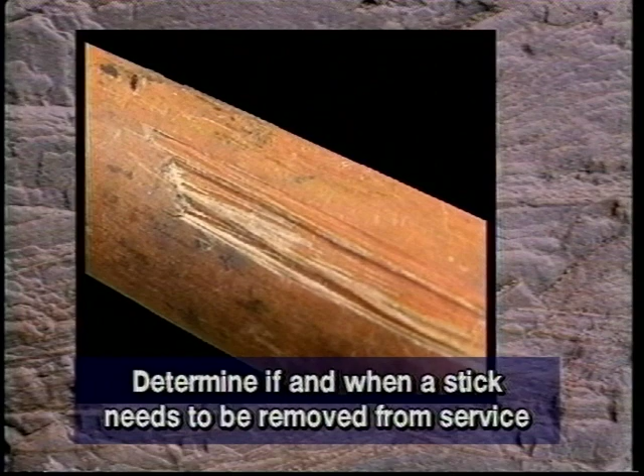Basic hot stick care, including wet-dry testing. The purpose of this course is to familiarize the viewer with information necessary to properly wet-dry test a hot stick, perform daily care and maintenance, determine if and when a stick needs to be removed from service, refinish or regloss a hot stick from a major manufacturer.

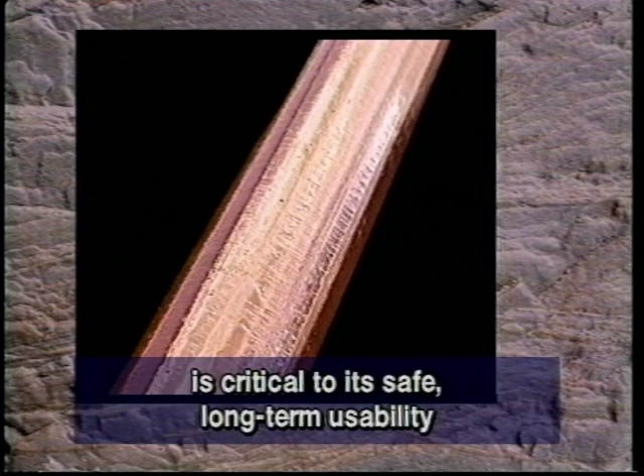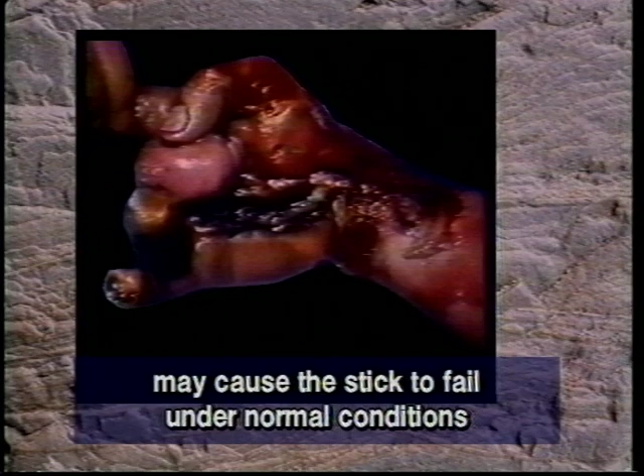The importance of a clean gloss finish on a utility hot stick is critical to its safe, long-term usability. Accumulated dirt, contamination, or the lack of a clean glossy surface may cause the stick to fail under normal conditions, resulting in death or injury to the user. Wet-dry tests have been developed to ensure safe operation of a hot stick. These tests should be performed every 6 months or when the condition of the stick is in question.

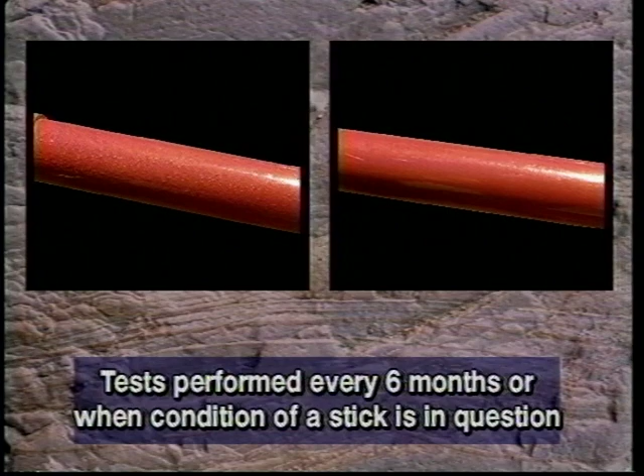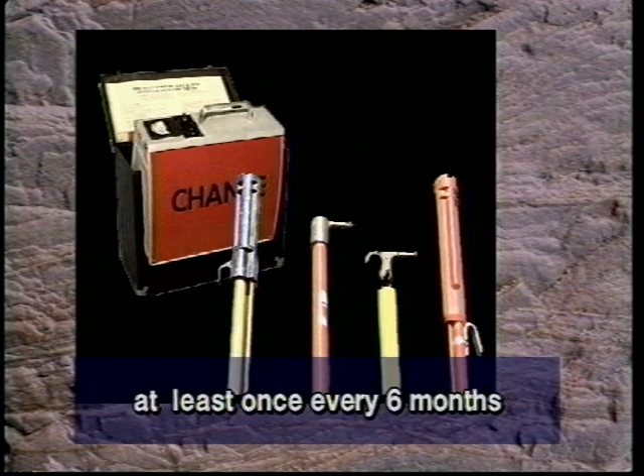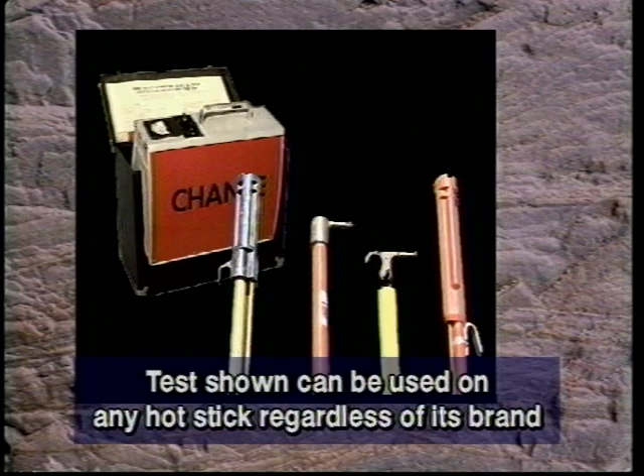Wet-dry testing. The wet-dry testing of a hot stick to 100,000 volts should be performed at least once every 6 months and before returning a stick to service after refinishing or repair, or when the condition of any hot stick is in doubt. The test shown can be used on any hot stick regardless of its brand.

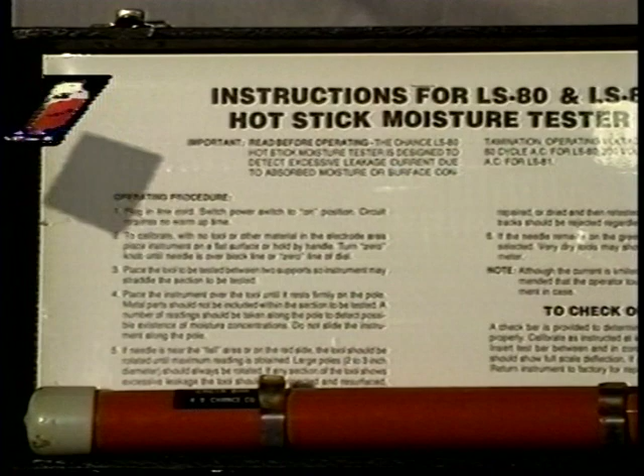Testers have been developed which operate on 120 volts AC. This tester, the AB Chance LS80, converts the AC voltage to 1800 volts DC and interpolates the information received, providing an effective test rating of 100,000 volts per foot, wet or dry. The procedures of the tester may vary, so follow the directions included with the tester owned by your company.

Calibration of the tester. Once connected to local current, the adjustment knob should be checked to ensure it is turned fully counterclockwise. Then, the tester is turned on and calibrated by adjusting the dial clockwise until the needle on the meter is in line with the calibration mark on the meter faceplate.

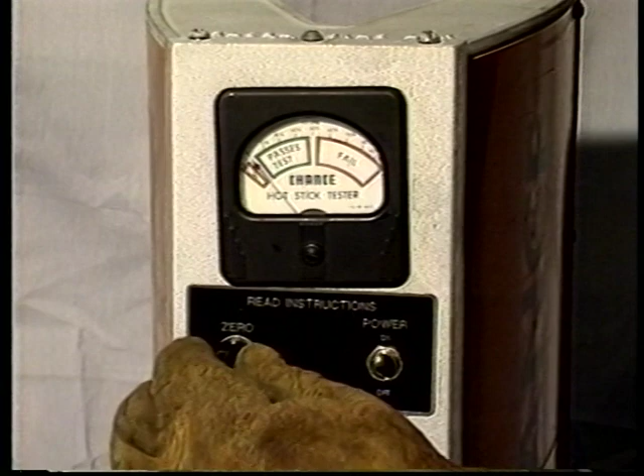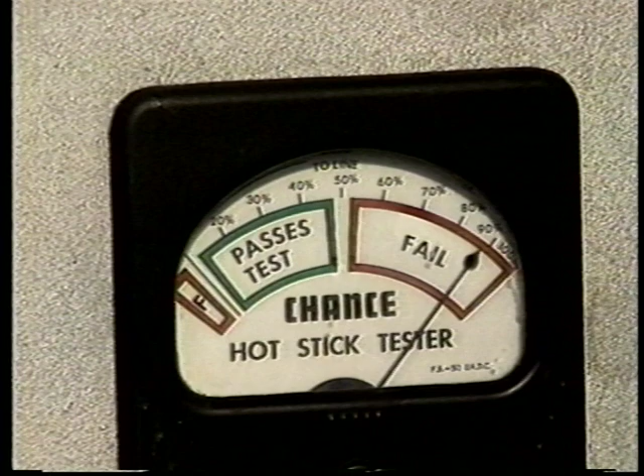This tester also includes a test bar, which is used to ensure the unit is functioning correctly. Carefully place the test bar into the tester. The needle should deflect to the right, indicating stick failure, showing that the tester is functioning properly. When the bar is removed, the needle should return to its calibration point.

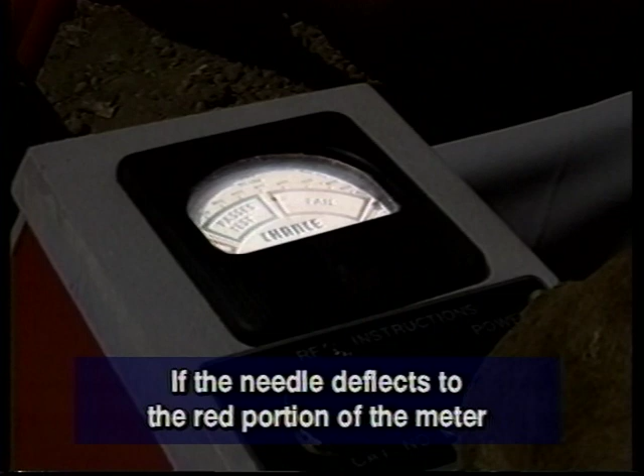Dry testing. The tool to be tested should be supported in a manner that allows it to be turned 360 degrees during the testing procedure. Position the tester over the stick as close to one end as is possible. Lower it onto the stick and observe the needle. On this tester, if the needle deflects to the red portion of the meter, the stick has failed the test and should be removed from service until repaired and retested.

Lift the tester off the stick, then move about 6 inches down the tool and lower it back onto the stick. Do not slide the tester on the stick, as it may damage the tool surface. Continue in this manner until the other end of the stick is reached. Once at the other end of the tool, lift the tester and rotate the stick 1/4 turn. Then test back to the other end. Repeat this process until all 4 quadrants of the stick have been tested. If at any time during the test the needle passes into the failed portion of the meter, the stick has failed the test and requires repair.

Wet testing. Wet testing is done in the same manner as dry testing, but with the addition of distilled or demineralized water applied lightly to the stick using a spray bottle. Note the clean, glossy surface of the tool. This causes the water to bead on the stick when it is applied. After applying water, the same procedures as the dry test are followed until all 4 quadrants of the stick have been tested. Again, if at any time the needle indicates failure of the tool, further repairs and retesting are required prior to returning it to service.

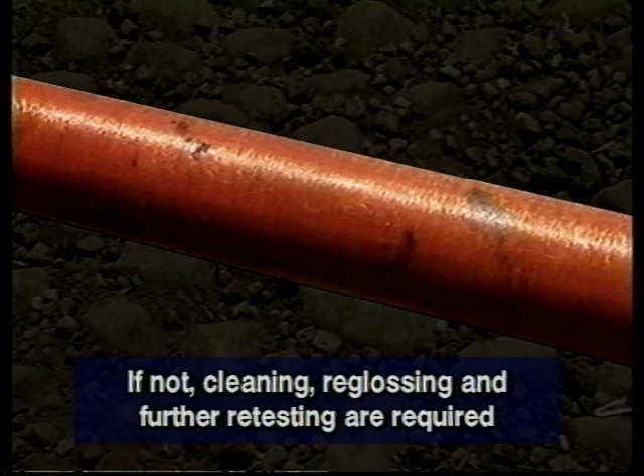In this example, when water is applied to this tool, which does not have a glossy surface, the water does not bead. It seems to soak into or mat on the surface of the stick, causing failure during the wet test. In some cases, a simple wipe down with a silicone cloth will restore the glossy surface sufficiently to pass the test. If not, cleaning, reglossing, and further retesting are required.

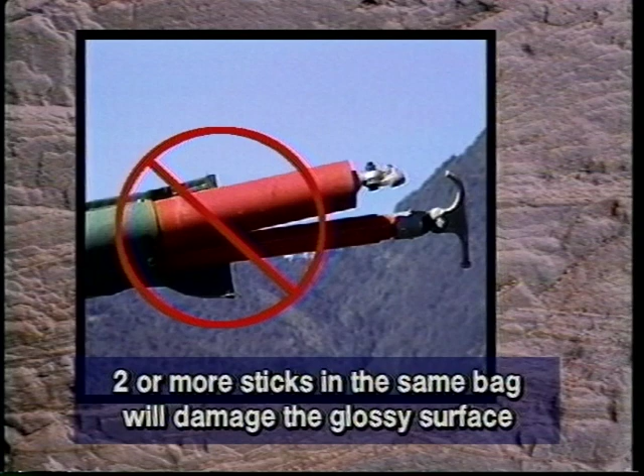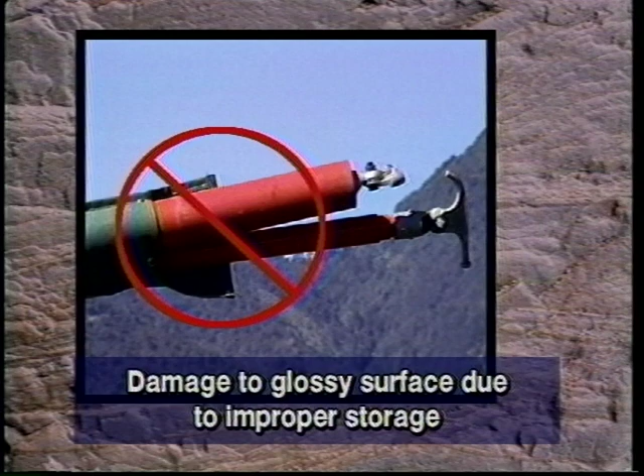Storage, daily care, and inspection of the hot stick. A hot stick tool should always be stored by itself in its bag between uses. Placing 2 or more sticks in the same bag will damage the glossy surface, allowing foreign matter to contaminate the stick. The damage to the glossy surface due to improper storage will also allow water to mat on the stick

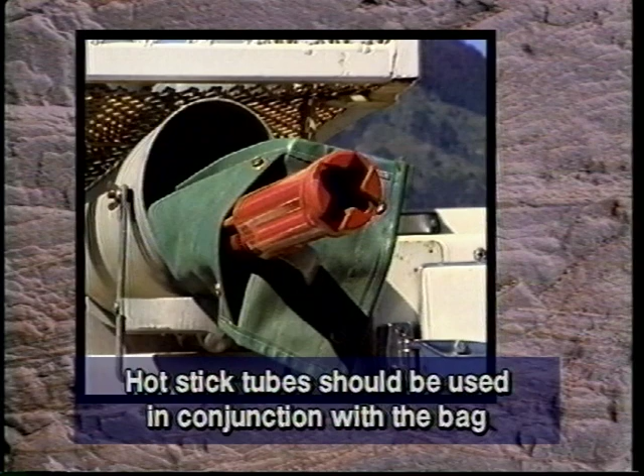during wet use. When possible, hot stick tubes should be used in conjunction with the bag to further protect the tool from accidental damage. In no case should a stick be stored in a hot stick tube without its bag. Prior to each use, a hot stick should be cleaned and inspected. This only takes a moment and could save the life of the user.

Each use cleaning is normally done with a silicone impregnated cloth. During this process, the stick is inspected. If lack of glossy surface or foreign matter is noted, an attempt should be made to restore the glossy surface or clean the tool using the silicone impregnated cloth.

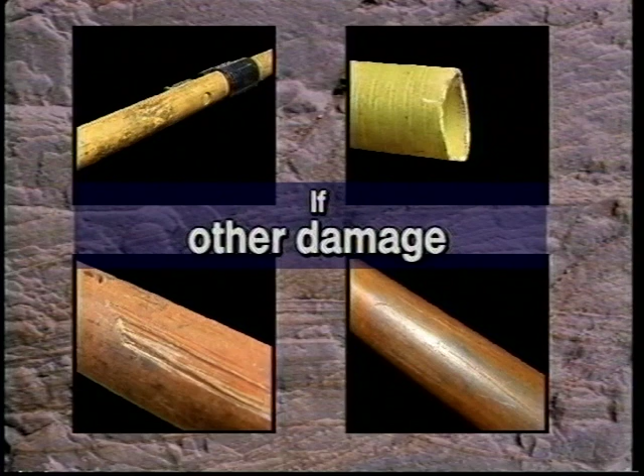If this procedure fails, or if contamination, discoloration, cracks, breaks, impact damage, scarring, or other damage is encountered, the tool should be immediately removed from service. Follow your company's procedures for replacing the damaged tool.

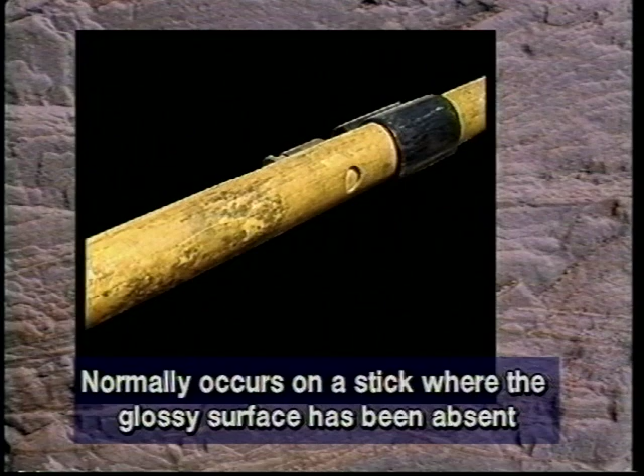Cleaning the tool. Contamination or discoloration normally occurs on a stick where the glossy surface has been absent for extended periods of time. This contamination may be conductive and should be removed from the tool using a non-metallic scratch pad and the cleaning solution recommended by your tool manufacturer. As noted, cleaning, repair, and reglossing procedures vary greatly by manufacturer.

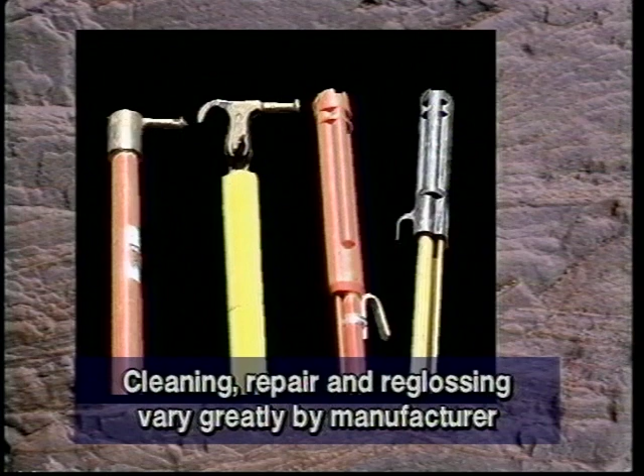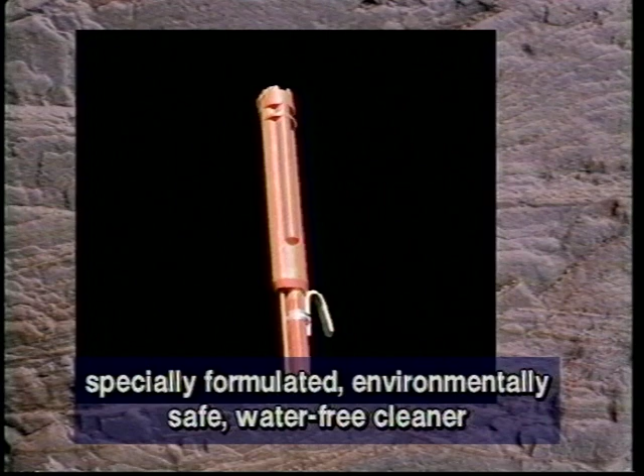The manufacturer of this stick recommends using a specially formulated, environmentally safe, water-free cleaner. While other chemical cleaners have been used in the past, such as methyl ethyl ketone or acetone, they are not environmentally sound.

Cleaning should be done in a well-ventilated area using rubber gloves, eye protectors, and other protective gear as recommended by the manufacturer. The tool should be supported on each end in a fashion that will allow full rotation during cleaning. Apply the cleaning agent to the non-conductive cleaning pad and clean the tool as shown. Clean the whole stick. Spot cleaning may lead to rough or uneven finish after the gloss has been restored.

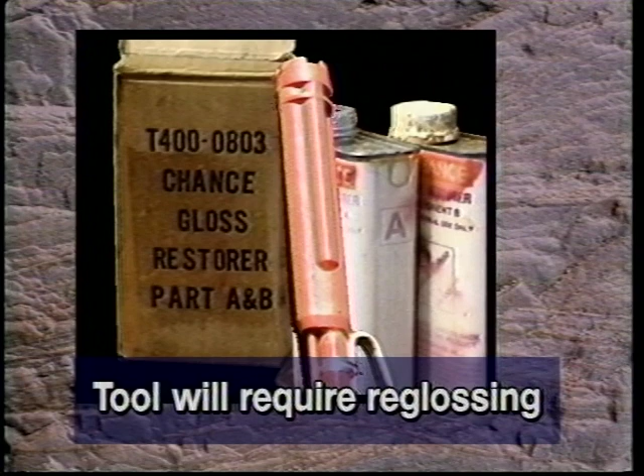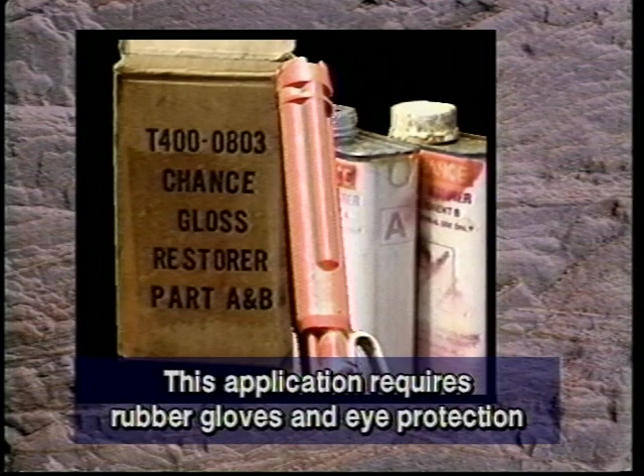Once cleaned, the tool will require reglossing. This brand uses a 2-part reglossing solution. As with the cleaning, this application also requires the use of rubber gloves and eye protection. The tool is supported on each end, allowing it to be turned during the application of the gloss restorer. Wipe the tool with a clean, lint-free cloth to remove all dust and contamination.

The reglossing compound is mixed and then applied using a clean, lint-free cloth. Starting at one end, work to the other, applying the gloss restorer as shown, using long, slow wipes. Turn the stick as needed to ensure that the gloss restorer is applied in an even manner. When completed, inspect your work closely to ensure all of the stick has been evenly coated with a gloss restorer.

The newly restored stick will be dried to a tack-free state in about 6 hours. It will be fully dried and ready for retesting in 24 hours. Once the stick has been reglossed, it must be tested prior to returning to service. Proper wet-dry testing is essential to the safety of the user.

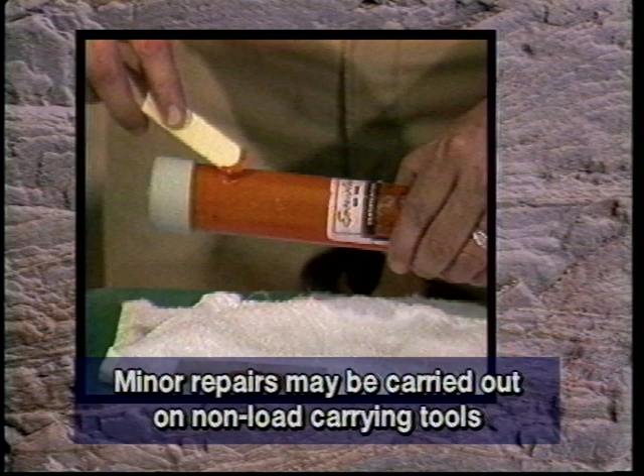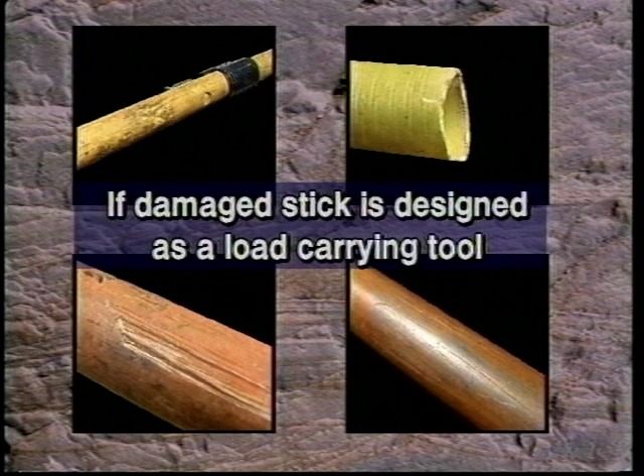Minor repairs may be carried out on non-load carrying tools using a two-part epoxy compound. Impact damage, cracks, scratches, and deep scarring may reduce the strength of the tool. If the damaged stick is designed as a load-carrying tool, factory or professional restoration may be required and is beyond the scope of this video. See your local representative for further information. Follow manufacturer's recommended procedures for the brand of tool which requires repair.

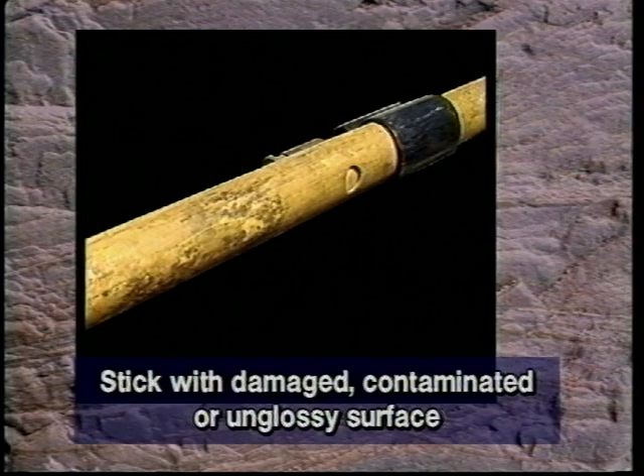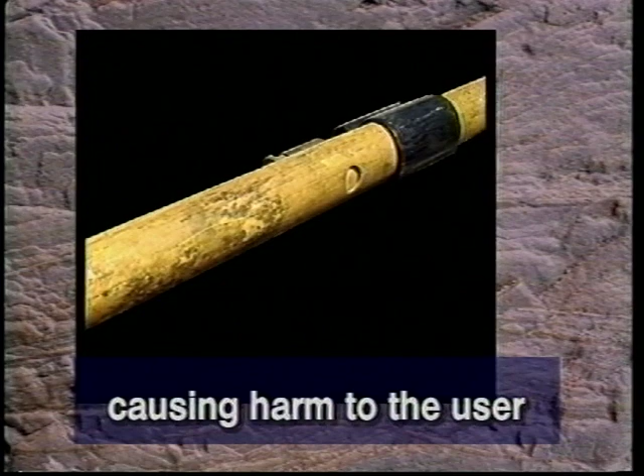Remember, hot stick tools require a clean and glossy finish in order to provide and maintain effective insulation qualities during use. A stick with a damaged, contaminated, or unglossy surface is susceptible to moisture and dirt, which may result in failure during use, causing harm to the user. Treat these tools with the respect and care they deserve. Follow the manufacturer's recommendations for cleaning and refinishing.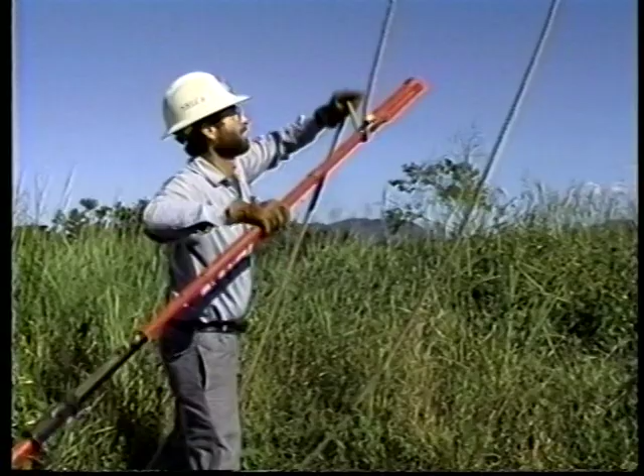Always store them in their tool bag when not in use to protect them from damage. Clean and inspect them before and after each use, and remove damaged or contaminated sticks from service immediately. Follow the procedures outlined in this course, and you will be able to use your tools with confidence that they will provide you years of safe and reliable service. Remember, safety first.